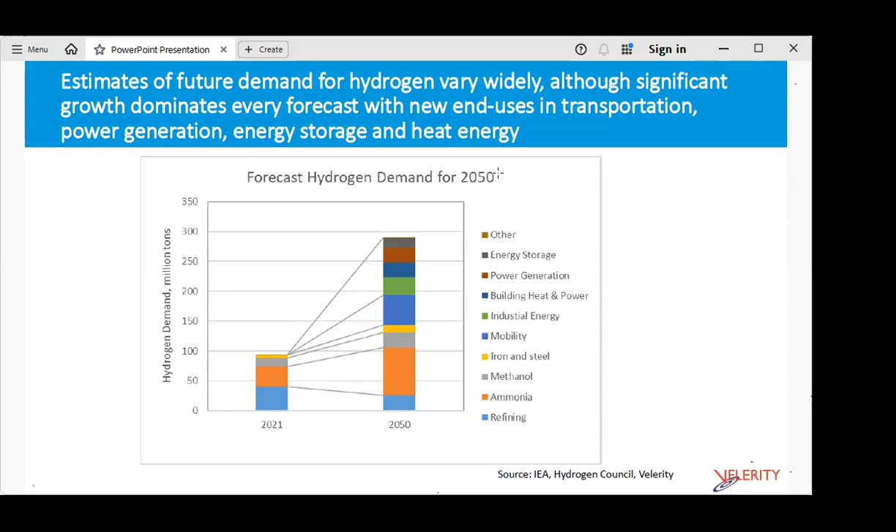And then we see additional new applications going forward, including transportation and fuel use, hydrogen as a fuel use. So the question is, is this real? Is this practical? And why is this tremendous growth potentially taking place in hydrogen?

One of the key factors in green hydrogen, in hydrogen that's produced on a low carbon basis, just to step back for a second, most hydrogen in the world is produced from steam methane reformation. Natural gas is converted into hydrogen using high pressure, high temperature, and catalysts. And that's the dominant way that hydrogen is produced today. And it's responsible for a fair amount of CO2 emissions.

So this transition, this growth in new hydrogen, it's not based on expanding steam methane reformation or fossil fuel-based hydrogen production. It's based on the economic viability of producing zero carbon hydrogen from water splitting. And this takes place using renewable energy that feeds an electrolyzer and splits water into hydrogen and oxygen.

And this process is really only predicated on this extraordinary change that has taken place across the globe, which is the vast reduction in prices of wind energy and solar energy. And that enables hydrogen to be a more compelling source of energy from an economic perspective.

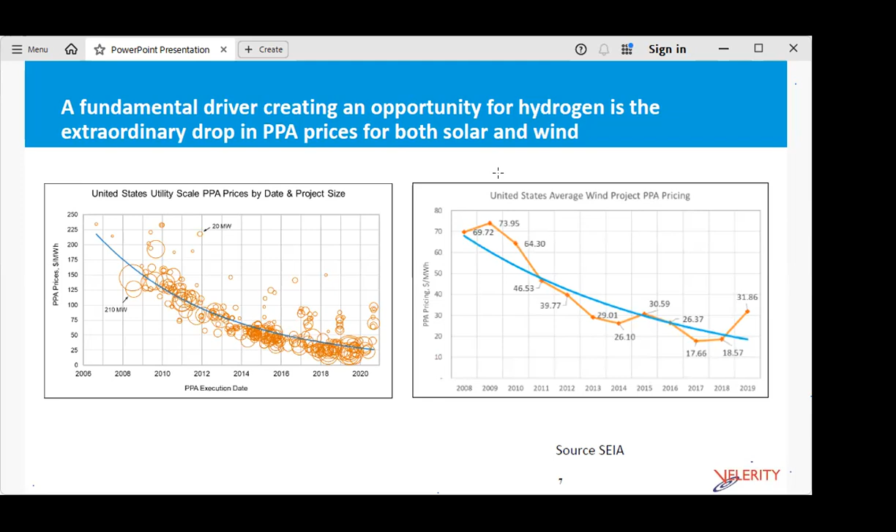Hydrogen is consumed in the same place that it's produced because it's very difficult to move hydrogen. This is one of the great challenges that are being addressed around the world, which is how do we get hydrogen from point A to point B cost effectively? It's very expensive to move as a gas because its density is very low.

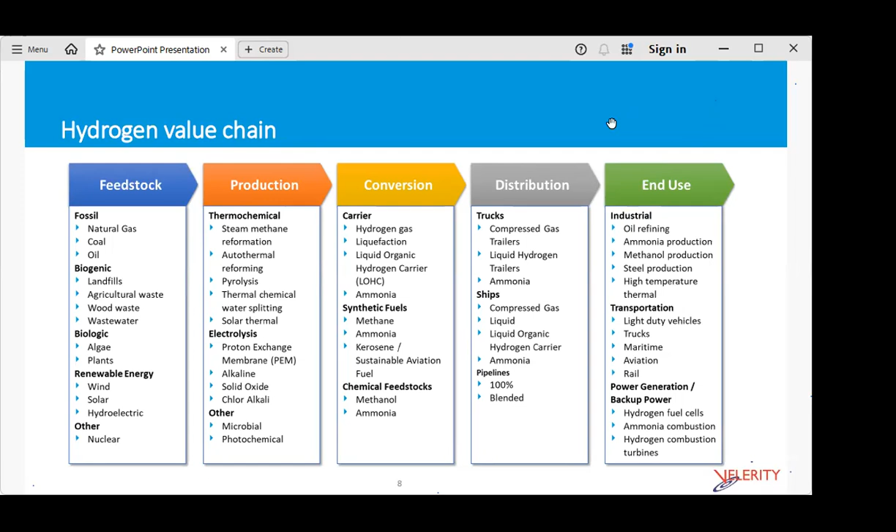So there is the conversion of hydrogen into other forms, including methane, ammonia, as well as kerosene, which is essentially sustainable aviation fuel, and turning it into other sort of chemical feedstocks. And that's ammonia, for example.

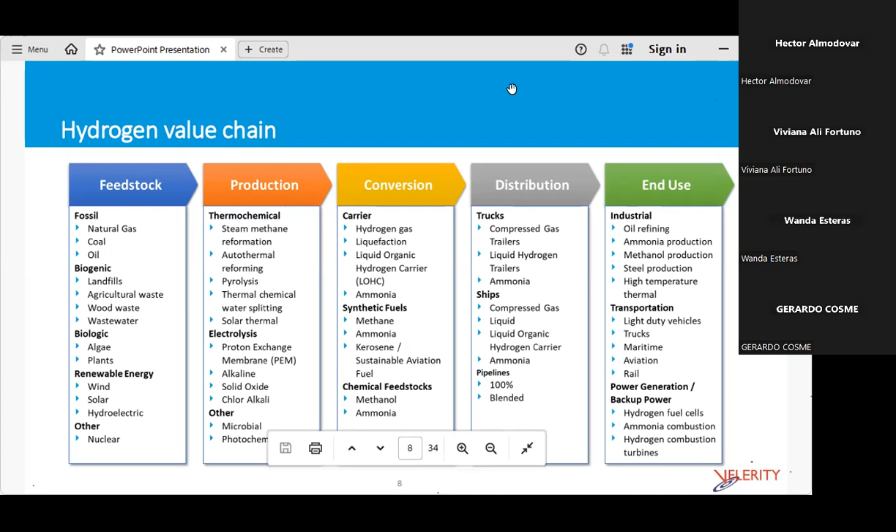Rico, also addressing the opportunity potentially to expand the economic activity within Puerto Rico and to potentially generate export revenues for the country as well. And we will talk about that going forward. And we also specifically wanted to use hydrogen initiatives to expand the capacity for Puerto Rico to increase renewable energy and reduce carbon intensity.

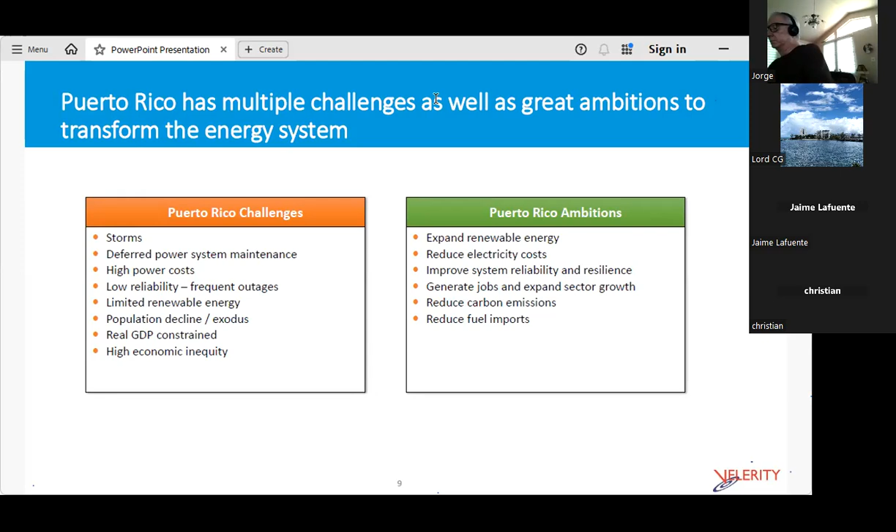And this is somewhat of a restatement, but the key here is that there is a potential for Puerto Rico to produce hydrogen from renewable sources, we'll say on the island, but really the dominant opportunity is offshore wind to hydrogen, and actually reduce the imports of energy and actually generate export revenues potentially as well.

So we have initiatives that produce ammonia. We have an initiative that looks at the production of aviation fuel on the island, and it could also be exported to the Caribbean region. And we have initiatives that address resilience and reliability with backup power and microgrids. These are just some of the initiatives we'll talk about in a minute.

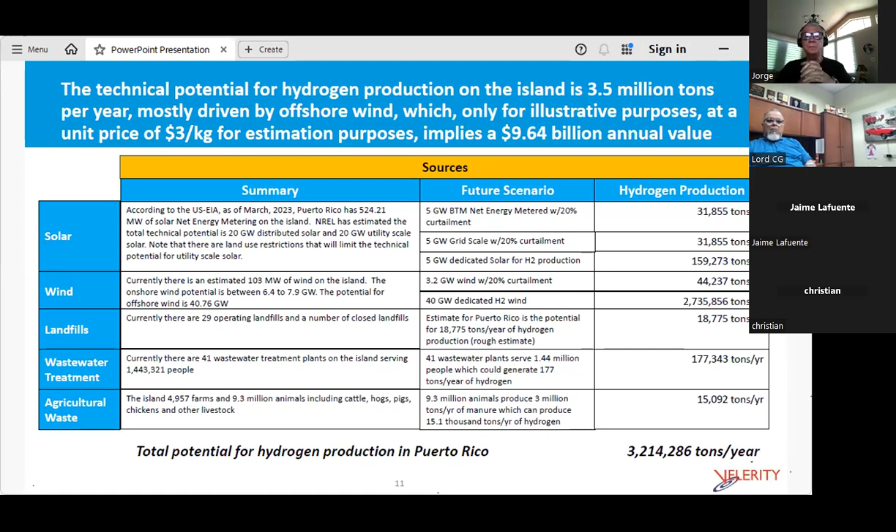One of the calculations we did to assess the opportunity for Puerto Rico is to determine how much hydrogen could be produced on the island from different sources. We do recognize we did not include the ocean thermal energy conversion. We have that calculation. It's just not on this slide. But this is somewhat of a way to take an inventory, as it were, to see what could be accomplished.

We did a calculation on solar, and one of the issues here is if we look at solar in places like California and in Germany, where there's a high penetration, we're seeing negative prices on the grid because of the overproduction of renewable energy. We also see increasing proportion of curtailment in those locations when the solar and the wind has to be turned off because the grid is not able to accept it, overproduction situation.

And we envision this occurring at some point in Puerto Rico as well. And that curtailed solar and curtailed wind can be used to produce hydrogen. Put those electrons to work. There are also opportunities to produce hydrogen from landfills in Puerto Rico, also from wastewater treatment plants and agricultural waste.

Now, I do want to point out the elephant in the room: if we look at wind, there are two categories of wind that were in this initial calculation. The first is the 3.2 gigawatts of wind with 20% curtailment. And I think this is off an NREL study that looked at the onshore wind potential in Puerto Rico, and we used a 20% curtailment number. And if that curtailed electricity was turned into hydrogen, it would produce 44,000 tons per year of hydrogen.

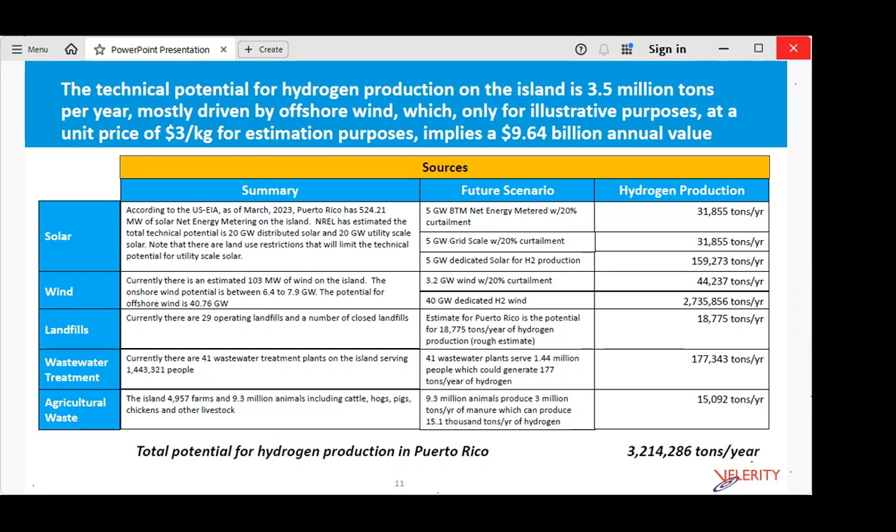And we'll talk about it, there are wind sites off the southern shore of Puerto Rico, including both fixed and floating wind turbines that have a fairly favorable capacity factor and wind profile. We investigated that wind resource, and we also considered the ocean surface set-asides where wind turbines could not be deployed. And we have these calculations further down in the study. Certainly no need to go to 40 gigawatts of wind, but we wanted to point out the massive potential.

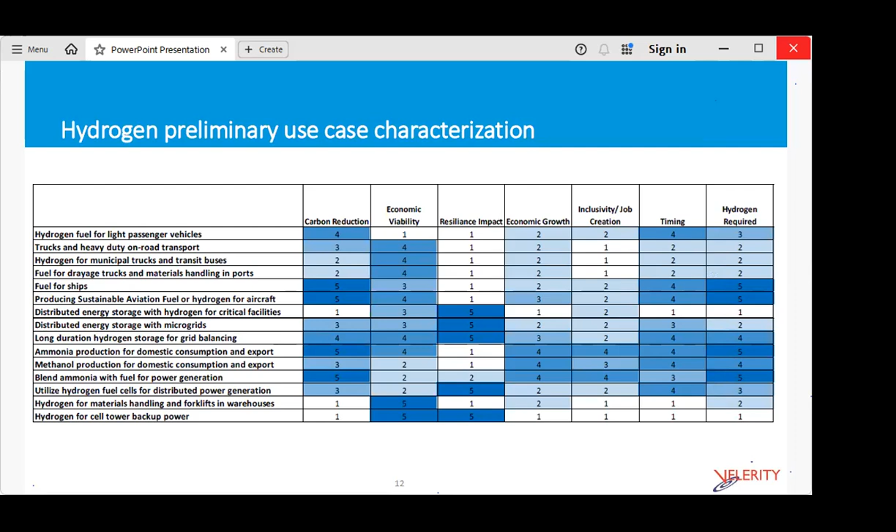As I've said, in our process we investigated a number of different applications. We rated them based on various criteria for Puerto Rico, and we identified 7 potential hydrogen initiatives that merited further assessment. That's what the current implementation plan is focused on: how do we further refine these opportunities and identify the likelihood of success from regulatory, permitting, economic, market, and technology perspectives going forward for Puerto Rico.

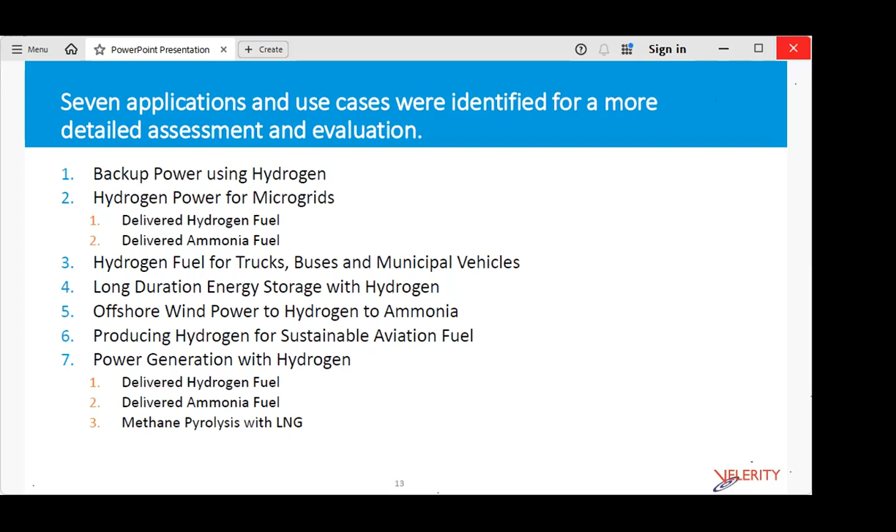So we will review each of these: backup power using hydrogen, hydrogen for microgrids, hydrogen in the transportation sector, long duration storage with hydrogen, ammonia production with offshore wind, and producing hydrogen for sustainable aviation fuel. Power generation with hydrogen also has some assessment in this project.

So we'll start — this is brief because we have lots of detail on these initiatives, but today we're just going to try to do our best to explain and help describe what it is we arrived at and what some of the options are.

So this is being pursued around the world: backup power for critical facilities. There are probably, for example, 60,000 cell towers around the world that use hydrogen for backup power. Why is that? Hydrogen can be a delivered fuel that lasts a long time, and it's cleaner and more efficient than diesel. It's also more robust from a technology perspective, and much better than batteries because it can provide much longer duration — that's really the key. You complement it with batteries, but it really extends the ability to provide clean power over a period of time.

So there are two basic solutions. One is an enclosed on-site hydrogen production solution where solar energy is producing electricity at a local facility. That solar energy can be stored in a battery for 8 hours of backup power, but then there's the opportunity to produce and store hydrogen and use that hydrogen to get, for example, 120 hours of storage. There are a number of different technologies that can be used for that, and the key is the storage medium.

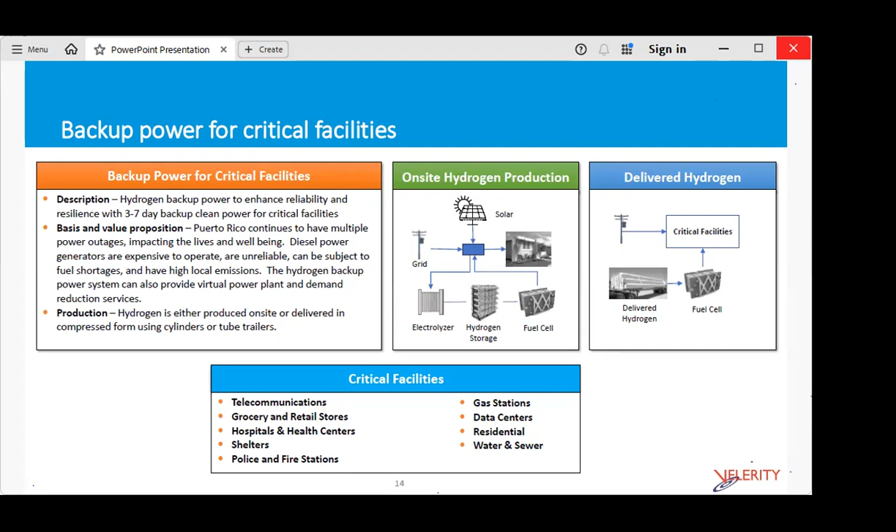So these are some of the technologies being deployed around the world that might be of interest to Puerto Rico. There are critical facilities that can be identified and prioritized for these types of technologies. And it's not to say batteries are not good — it's necessary to have batteries — but hydrogen provides a longer duration solution.

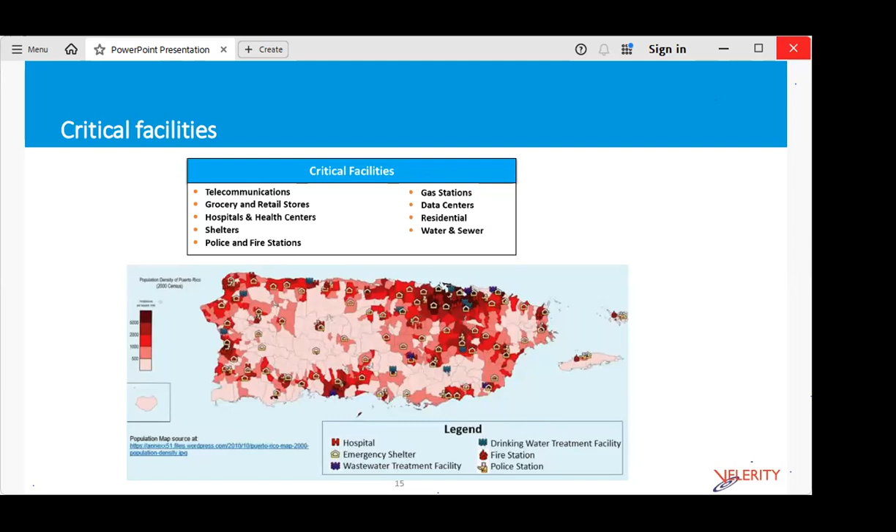The second major initiative we're looking at is microgrids. Microgrids vary in size, and depending on the size of the microgrid, that will determine the type of technology deployed. The small microgrids can use on-site hydrogen production, storage, and power generation, similar to the backup power solution. This is designed so that solar plus batteries are enhanced with a hydrogen solution that enables the microgrid to operate independently of the grid — that's the enabling solution hydrogen can provide. In almost every case we've seen in different parts of the world, hydrogen replaces the diesel gen sets that are typically used.

Also, there is the use of solid oxide fuel cells that run on natural gas, but that still emits carbon. So hydrogen provides a clean, distributed solution to complement solar plus batteries in the case of Puerto Rico.

The other types of microgrids relate to medium size and then very large microgrids, and these are based on a delivered hydrogen model. There are two versions of delivered hydrogen: straight delivered hydrogen, which you can see is a tube trailer, and deliveries of liquid ammonia stored on site. A few of those projects are going forward, and that's similar to a delivered fuel solution, but it's a clean fuel that can be produced in Puerto Rico.

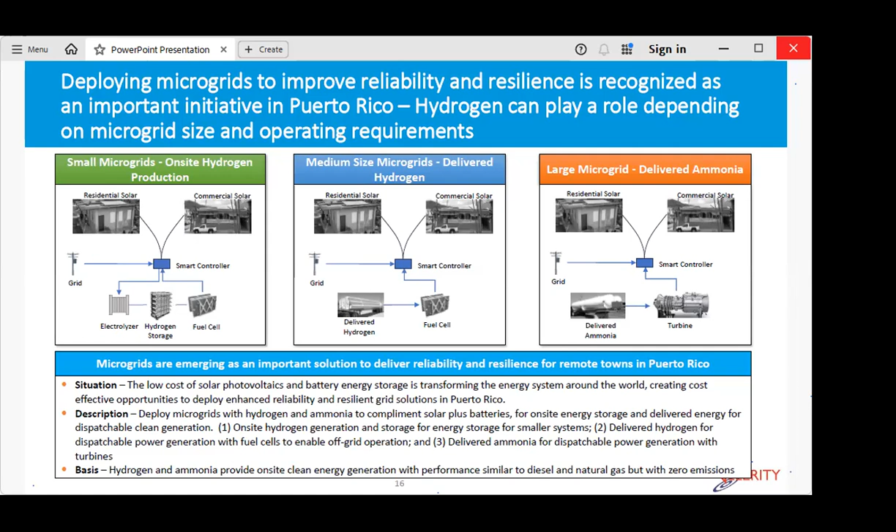The transportation initiative, I think it's important to include transportation. I want to make it absolutely clear, however, that the dominant transportation use of hydrogen today is for large trucks, heavy vehicles. These vehicles benefit from hydrogen because of the distance they travel, and it's very hard, considered very difficult for electrification. To be clear, electrification is a very important part of every strategy, but there are limits to the technical and operating implications of electrification of large trucks.

But here's the thing, Puerto Rico does not really have a long distance trucking market, so large trucks traveling on the highways in Puerto Rico is not necessarily a priority application. It really is more what we identified in terms of targeting in the box on the right: drayage trucks in the ports, which take containers out of the ports to distribution centers, and an important market of municipal fleets, including dump trucks, garbage trucks, intercity buses, and municipal buses.

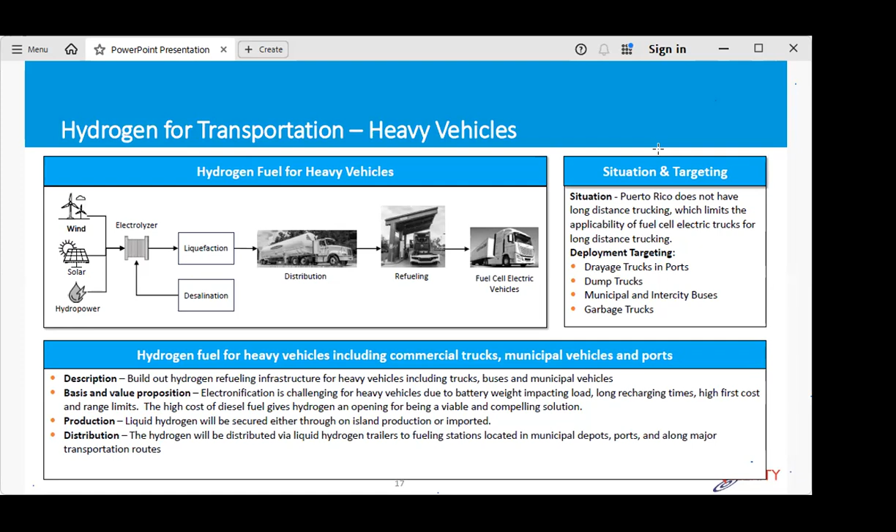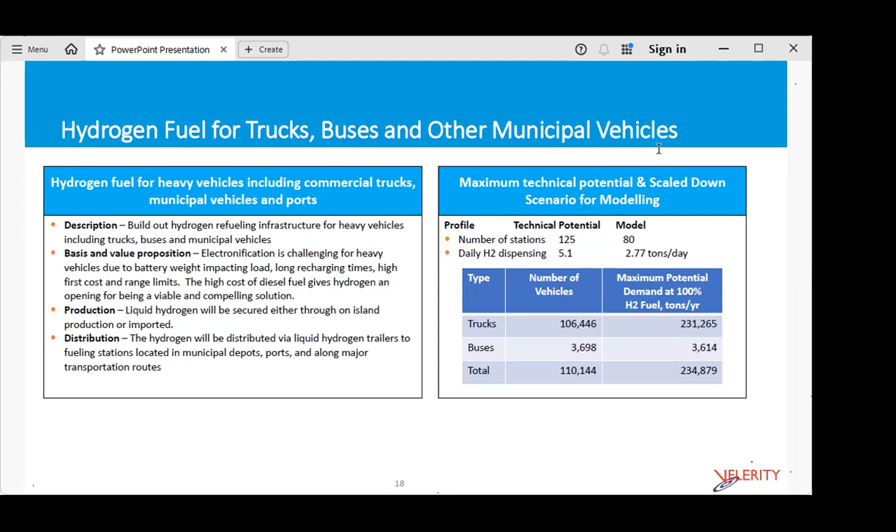So we did model the potential, but again, we think this has to be a more targeted solution around the potential for municipal vehicles and the drayage or container transport trucks out of the ports as well. The ports have the opportunity to have the lift machines run on hydrogen, which can sometimes help alleviate some of the challenges with the electrical load associated with the heavy lifting capabilities.

So another potential solution for Puerto Rico is long duration energy storage. Now, we did take a careful look at the NREL study, or the PR 100 study, excuse me, and they had two sort of surprising elements of their 2050 scenarios. One element was unspecified long duration storage, and the reason being is that lithium-ion batteries, which dominate today, are very important, but the capital cost associated with having 3 to 5 day to multi-week energy storage using lithium-ion batteries is just not viable from a capital and economic perspective. So alternative solutions for long duration storage are being developed around the world, and hydrogen is one of those solutions.

For example, there's a very large underground hydrogen storage project underway in Delta, Utah, to store renewable energy in the form of hydrogen, and then to store that hydrogen in times of overproduction of renewable energy, and then to release the hydrogen when the grid needs the power and the renewable energy is not providing enough. It's what could be termed an arbitrage opportunity, and 30% of the time might be producing hydrogen, and then 30% of the time would be releasing that hydrogen to generate power.

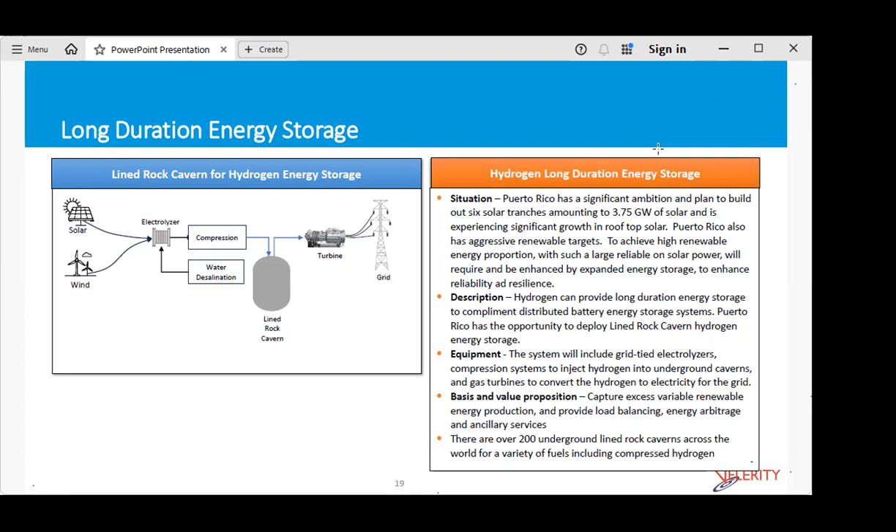Small footnote on this slide: there are 200 lined rock caverns around the world that store a variety of materials. So this is an established technology.

We modeled an illustrative day in 2030 in terms of solar. Again, this is a very high level analysis, but we wanted to understand what the potential role of hydrogen long duration storage would be on the Puerto Rico grid. So we modeled a very specific scenario to see what the implications would be.

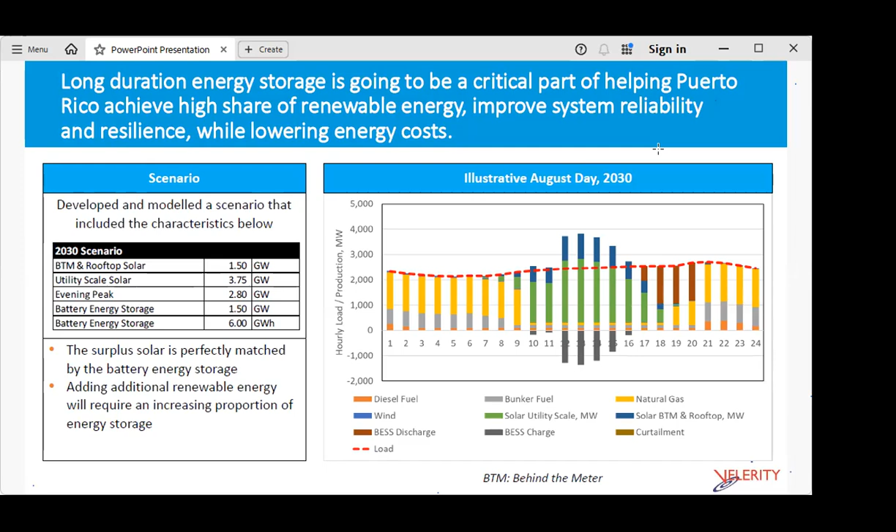The whole idea is: is there a limit to how much renewable energy can go on Puerto Rico's grid, and what is the role of long duration energy storage in releasing the opportunity for greater penetration of renewable energy on the grid. And absolutely critical is that Puerto Rico has a very aggressive, and appropriately so, solar initiative.

But there's the potential on the island, a truly islanded grid, that a certain portion of that power will be stranded, as there will be overproduction circumstances. And the question is, how can we economically use those stranded electrons? Hydrogen is one of the solutions that can be used in that case.

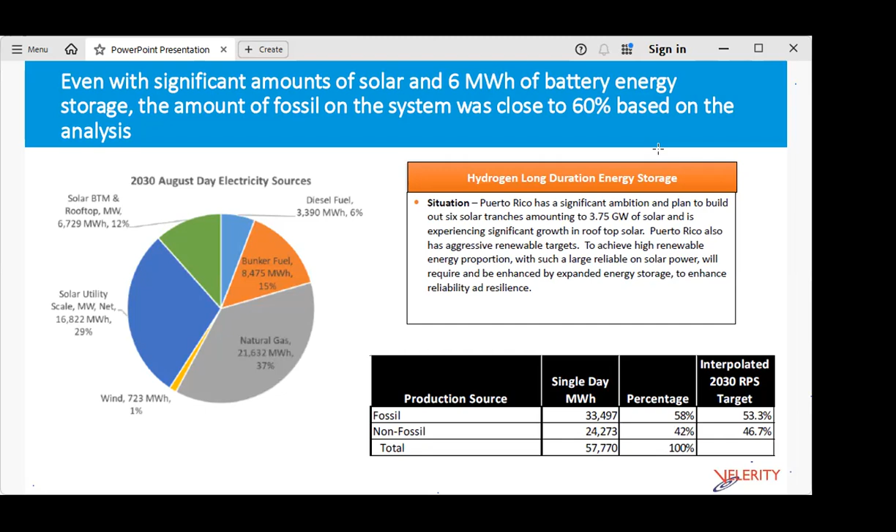We put together a summary of the numbers. We're not going to go over these numbers today, but I want to just provide this as one example. We did detailed analysis on all of the initiatives, and to respect time, we're not going to go over all those numbers today.

In this particular case, we did a model that did arbitrage on power for the long duration energy storage. It's a fairly large system: a 300 megawatt combined cycle turbine, a 550 megawatt electrolyzer, with arbitrage pricing of 7-cent power purchase and 12-cent power sale price. The economics were viable based on these analyses, which is certainly available, but again we're not going to dig into all the detail today.

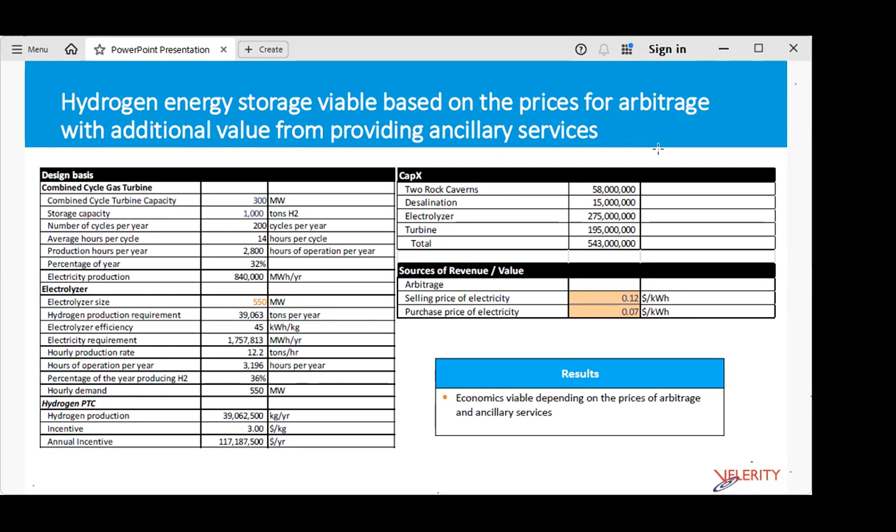Another very innovative solution for Puerto Rico—not innovative from a technical or risk perspective, but just in terms of a shift here—is that we did a detailed analysis of the offshore wind potential.

We know that the previous integrated resource plan, not the current one, had a requirement or request for doing additional wind resource assessment in Puerto Rico. We're interested in seeing if that assessment was performed. We have the analyses enclosed, which identify areas for potential offshore wind. We characterized the wind resource and calculated the potential production from offshore wind.

The discussions with potential wind developers - we spoke with Ørsted, and then another wind developer, and asked what's the potential in Puerto Rico, are you interested in Puerto Rico? Their basic concern was the Puerto Rico grid is not big enough to warrant a very large offshore wind farm. These offshore wind development projects take on average about 8 years. They're very large in scale, usually around 1 gigawatt or larger. So these are massive projects, and wind developers want to make sure the grid is large enough to take the power to support the economic business cases they have to make. Puerto Rico's grid was not considered large enough to warrant wind companies coming in and making a case for development.

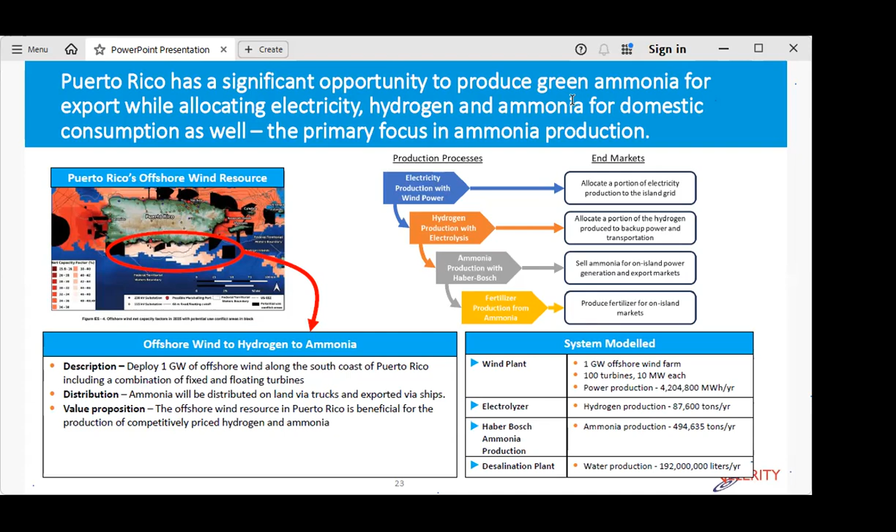We have additional information on the system, but we're going to just keep moving today.

Another opportunity is that Puerto Rico consumes 400,000 tons per year of aviation fuel on the island - that's 180 million gallons of jet fuel per year. That costs money to import, and it certainly is emissions driven. But the opportunity exists potentially for Puerto Rico to leverage additional offshore wind to produce sustainable aviation fuel and provide that fuel on the island, and potentially as an export product to the Caribbean region as well.

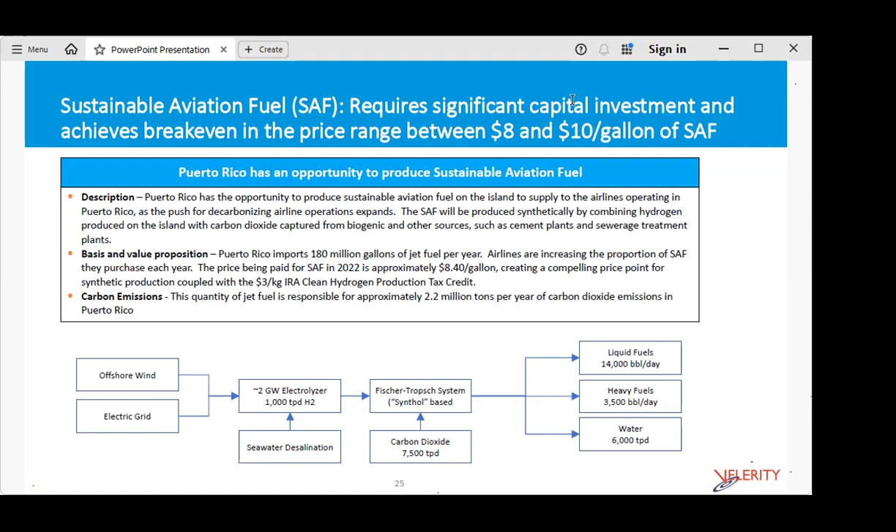Now, the final initiative that we looked at last year was the opportunity to produce power from hydrogen. We scoped out 3 scenarios. One scenario is to use hydrogen for power generation, and this is large scale, grid scale, 200 megawatt plants to 300 megawatt plants. You could also use ammonia produced on the island or imported for power generation.

A final scenario is methane pyrolysis, where LNG is imported. The LNG is then run through a pyrolytic process, a very high temperature with a catalyst that splits the natural gas into its components of hydrogen and carbon, and the carbon precipitates out. I heard it recently said it's like a filter on the natural gas - you're filtering out carbon before it turns into hydrogen and can be used for power generation. So it's a way to take out solid carbon.

There is an energy cost in the process, but it's not as challenging as trying to take CO2, carbon dioxide, and embed it underground or under the sea, et cetera. So it's a different process, and we ran the numbers. Fundamentally, there's no business case for using hydrogen directly in large scale power generation. It just logistically and economically is not viable.

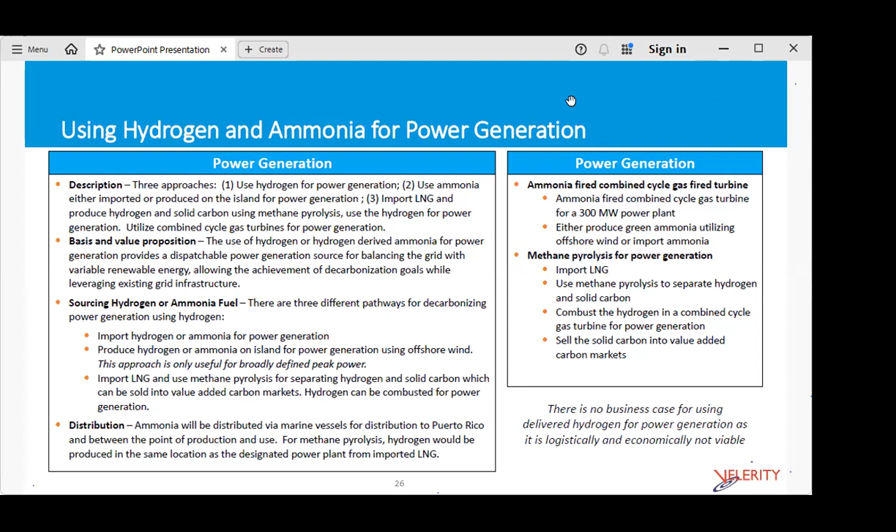As I said, those are the three scenarios we modeled. And the economics, you can see the three scenarios: a 200 megawatt power plant based on hydrogen, ammonia, and methane pyrolysis. We have a summary of the economic analysis we performed last year, showing the delivered hydrogen price, the delivered ammonia price, and the methane pyrolysis price of electricity. It's not a typo because of various incentives.

The methane pyrolysis price appears to be negative here, and that's because you actually can sell the carbon. You can actually generate benefits of up to $3 a kilogram for the hydrogen, and then you certainly sell the power as well. So there are three different sources of revenue when you're involved in a methane pyrolysis system.

The hydrogen incentives will vary based on the carbon content, so I don't want to hold out that it's $3 a kilogram. It's going to be less, but that incentive exists as well. We were surprised by these results, but it warrants further inspection, and that's part of what we're doing this year.

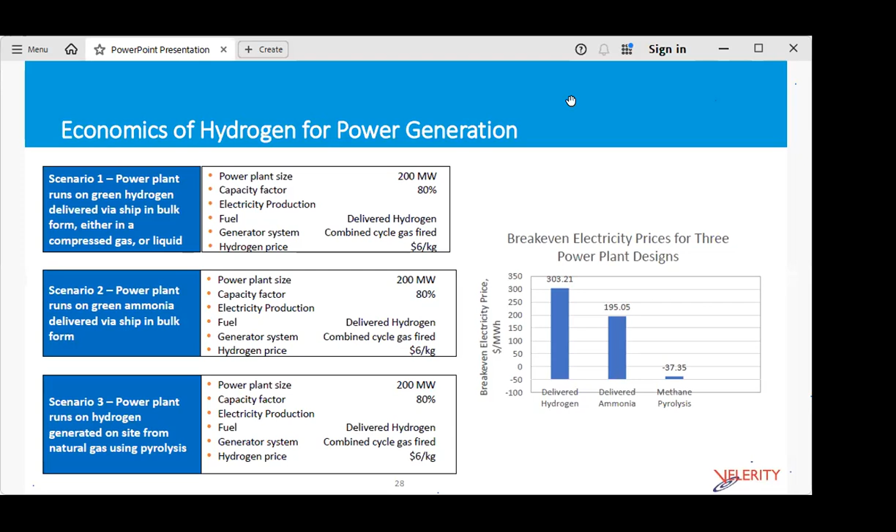So, a quick transition to what we're up to now in terms of the hydrogen implementation plan. Just a couple of slides, and then we'd like to open it up for any comments, discussion, or questions today.

The core purpose of the current project, which is to develop the hydrogen implementation plan, can also be referred to as a hydrogen roadmap for Puerto Rico. The purpose here is to identify what are the challenges and barriers associated with implementing the hydrogen initiatives we've just discussed, and what are the potential solutions needed to overcome these potential barriers and challenges.

We also will be refining the hydrogen initiatives based on both analytical work as well as input from equipment providers, market participants, and regulators in Puerto Rico, et cetera. But this is very important to get feedback from stakeholders in Puerto Rico. This is a very important part of this project and initiative, as part of refining these initiatives and identifying those which should move forward.

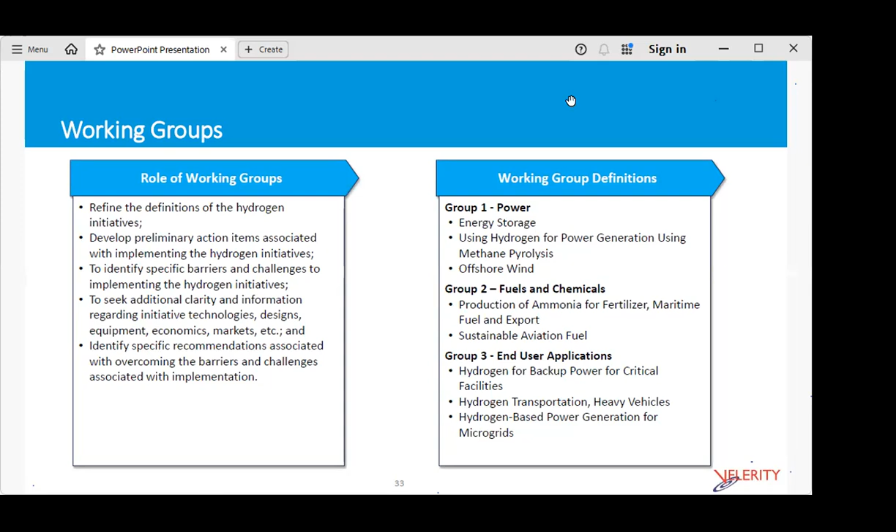So thank you for bearing with me. We used to call this drinking from a fire hydrant. So a lot of information to absorb, but we thought it would be important to provide a sense, a taste of what it is we're up to as this process moves forward. And we welcome any comments or input at this time. But again, we are encouraging participation in our working groups, and it's a very important part of the success of this project. We just really want to emphasize the importance of your participation in the working groups if you're available, or if there are other delegates that you might consider including in the working group meetings.